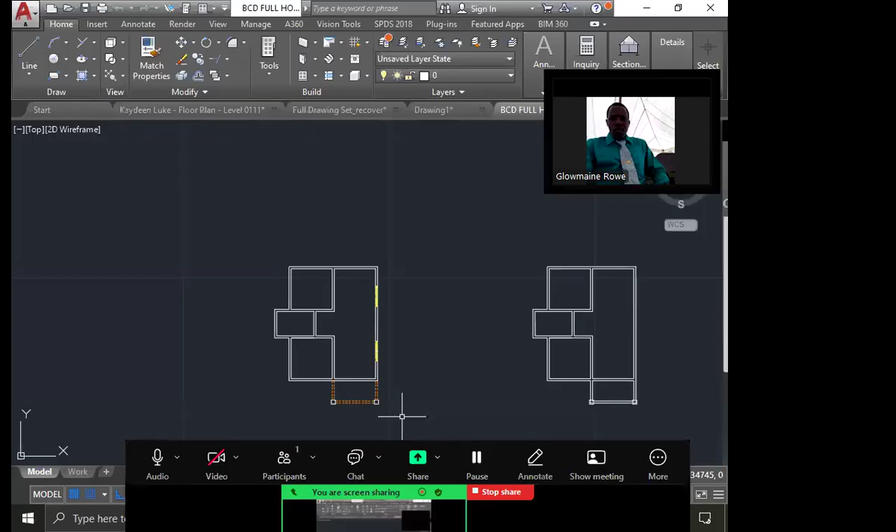It seems the latest progress from the last drawing was not saved, so I'll just begin from where this one left off. So we're currently working on putting in all the windows and all the doors.

We said there should be a line on either end of both your windows and your doors to represent a break in the wall, an opening in the wall. So we said the door was 1,000 millimeters.

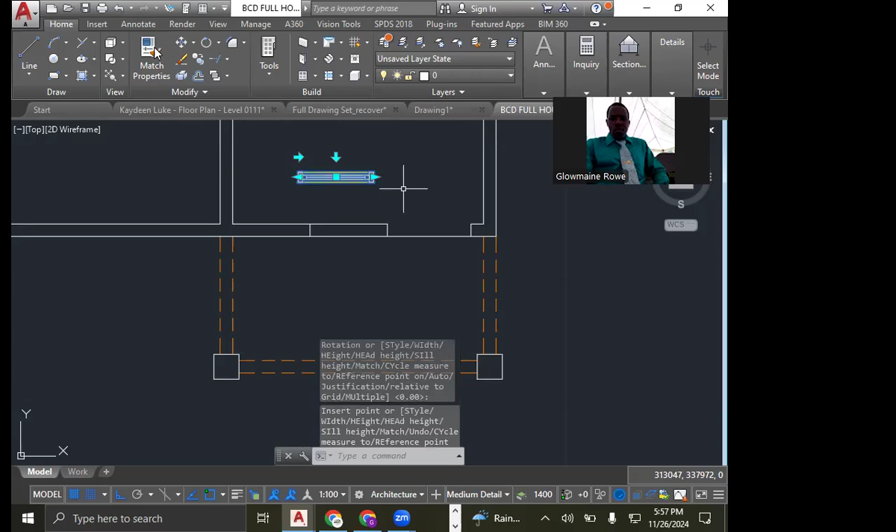Go again, not hearing you. Which one? Windows, I'm finishing up the windows first. Yes, because my job wasn't saved, so I have to start back from there.

As a rule of thumb, try to ensure that your windows are centered in the span of the wall in each room as best as possible, so that the natural lighting is evenly distributed.

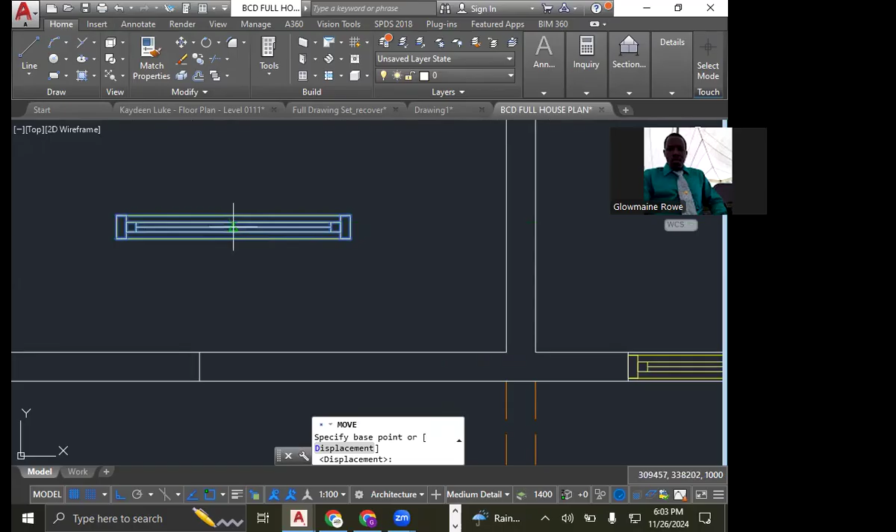Yes, remind me of your name. Sir, just walking in, remind me of your name, for the register. Francis. Yes, name? Samuel. Samuel? Yeah, right. All right, so Francis, all right.

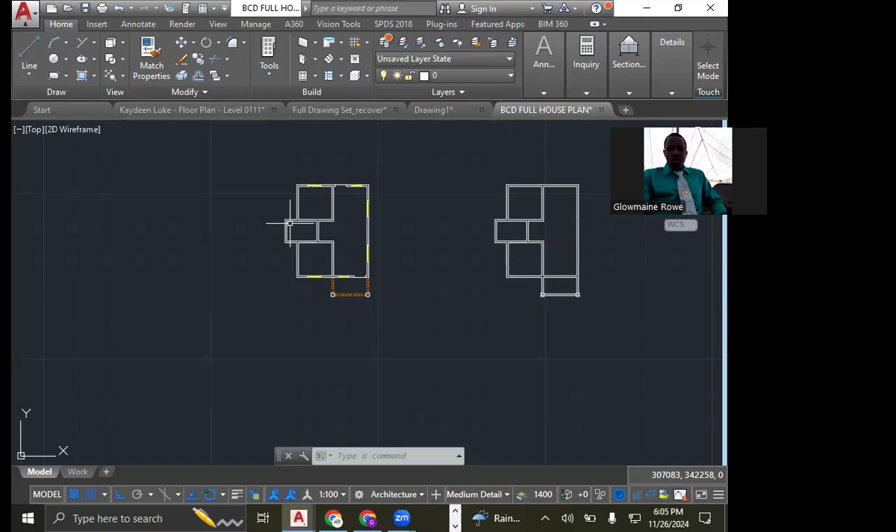Name? Craig? Ryan. Yes, Shani. So for the future, once you come into class, after class begins, just make sure you stop and get a name mark. All right.

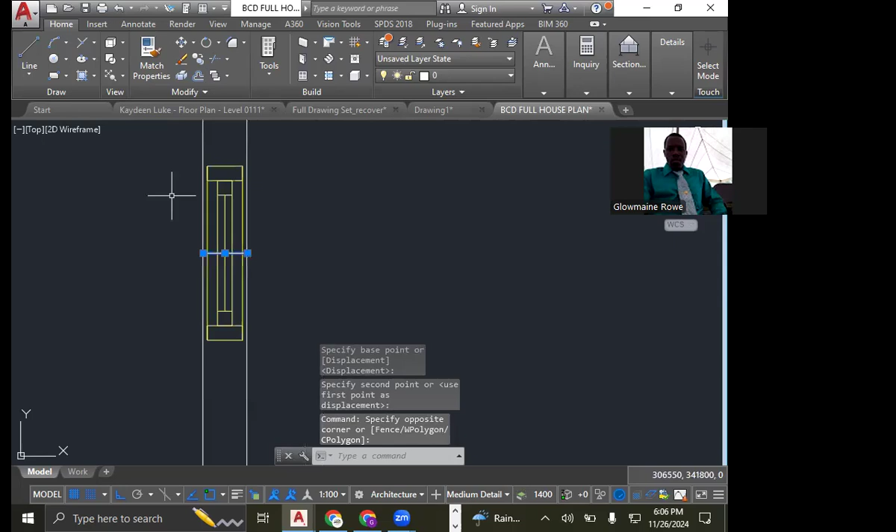Christian, you have all your windows in place already? Okay. Okay, so, okay. All right, let me see more to this now again.

All right, so we're gonna put in doors now. By the way, a trainee pointed out last class it was an oversight that the doors, based on safety standards, the front door and the back door are supposed to be swinging outwards. So even though on the drawing we have it swinging inwards, we're gonna make ours swing outwards.

So for the door, same procedure. We type the word door, or we can find the door icon here in the upper command ribbon. If we're gonna type it, you type the word door, then press enter in your command line, which is set to 1000. Then we right click.

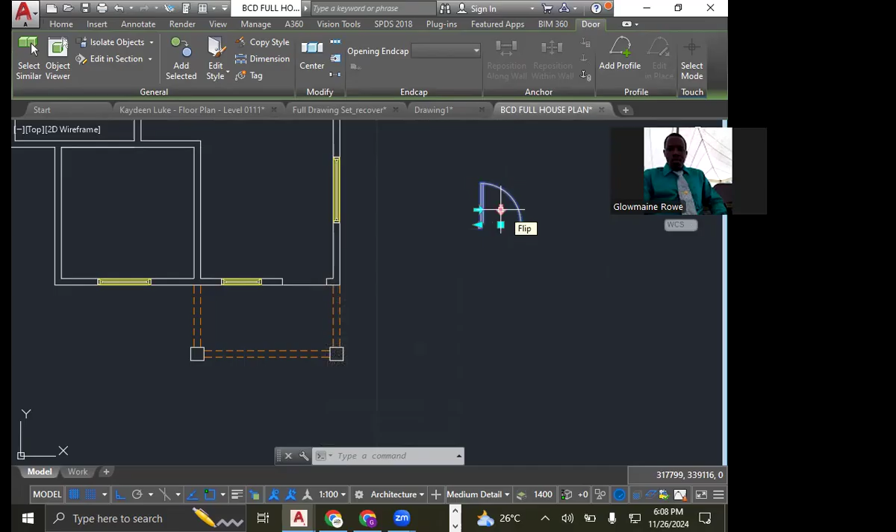Then we click, left click, or regular click. Move our cursor to the right, click again, press escape. Then we highlight our door. We want to change the swing of the door, so we press this arrow in the center of the door.

And then we press the arrow at the side of the door. Now we're going to select the move command, holding the door from the center of the door jamb right here, and we place it at the center of the wall.

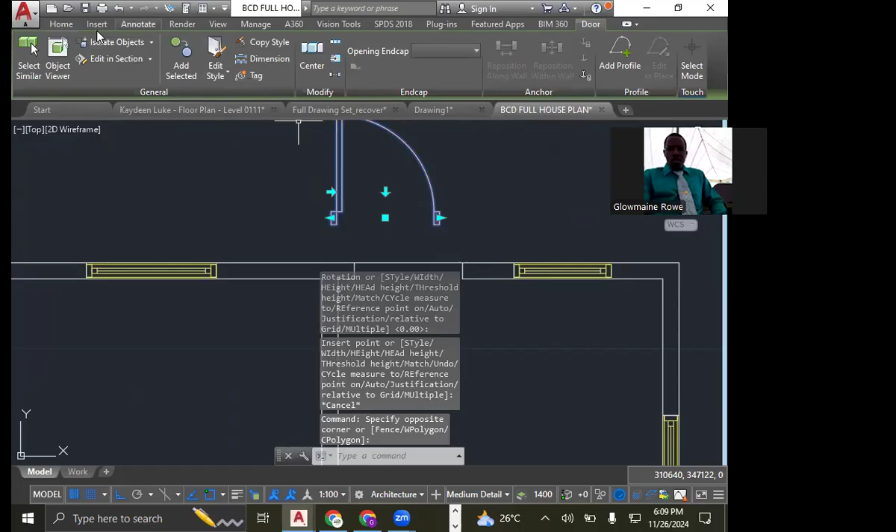Let's do the same thing for the back door. So we right click, left click, move your mouse or cursor to the right, then left click again, press escape. Highlight our door, select the move command, and we're going to hold the door from the center of the door jamb and paste it at the center of the wall.

So 2 doors down, 3 to go: 1 for each bedroom and 1 for the bathroom. So I believe we had said the doors for the bedrooms was what? 850? Was it 850? Anybody took the photo? The size for the doors... 950. Okay.

So we're gonna step off 150 from the wall. We draw a line in the corner there, and we're gonna move it 150. Then we're gonna offset it 950. And then we're gonna trim out these 2 lines. This is an inside door, therefore we trim out both lines. TR, enter twice, and we trim out these 2 lines.

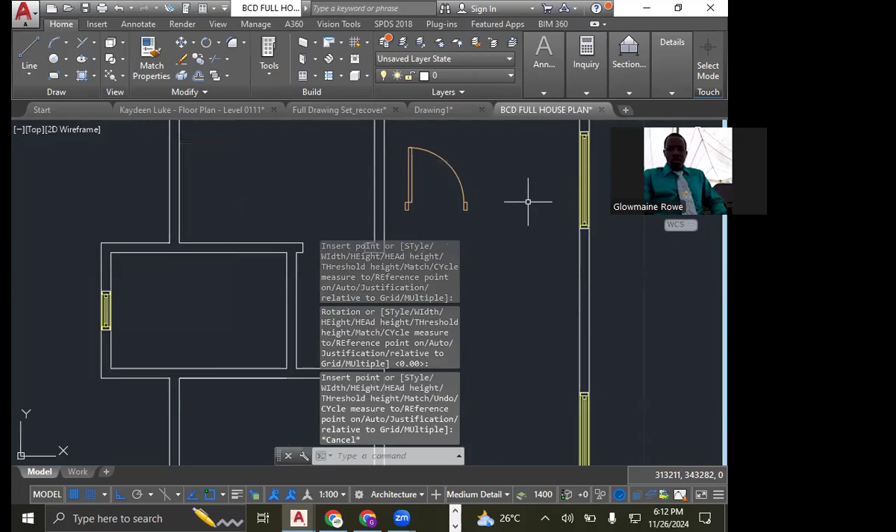Change the width to 950. Click again, press escape. Now we want the swing to go from left to right, so we press this arrow. And then we simply move our door in place.

Instead of repeating the whole process for the other bedroom, we're simply going to mirror this door. So we highlight the door.

If you highlight something that you do not want to highlight, hold shift and click on that item. You'll see a minus sign come up above the cursor that allows you to deselect an item. This can come in handy, for example, when doing a roof plan and highlighting multiple members at once, and you accidentally highlight something you don't want. Instead of starting all over, you can hold shift and deselect.

So here we go again. I highlighted this by mistake, so let's hold shift and deselect.

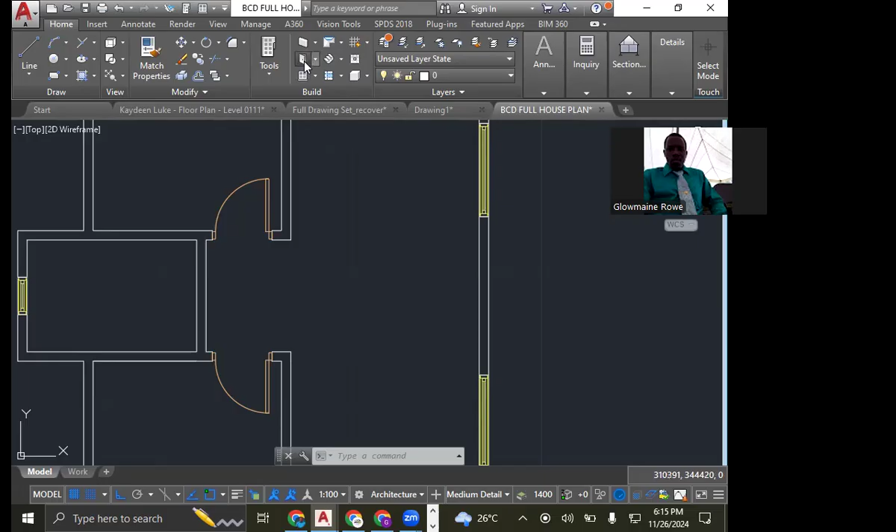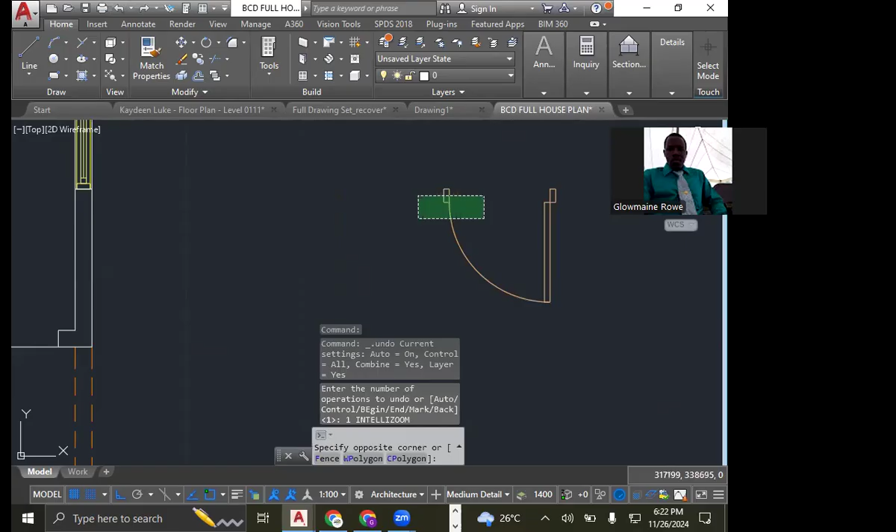All right, so you're going to make the space for your front door and for your back door. So for the front door, let me just delete this. We don't have time to go over this multiple times, training, so I'm just going to go over it once and then we'll move on.

So at the front door, we're going to select line, draw a line here in the corner, and draw a line there in the corner. Then this line, we're going to highlight it and select the move command. Click anywhere, move your cursor to the left, and type in 150.

And trainees who already have your doors in place, proceed to label your rooms. Give each room a name based on the photo in the group.

I'm going to highlight that line, we're going to offset it. Type offset, press enter. It asks you to specify offset distance, punch in 1000, then press enter. We'll move our cursor to the left, and we click.

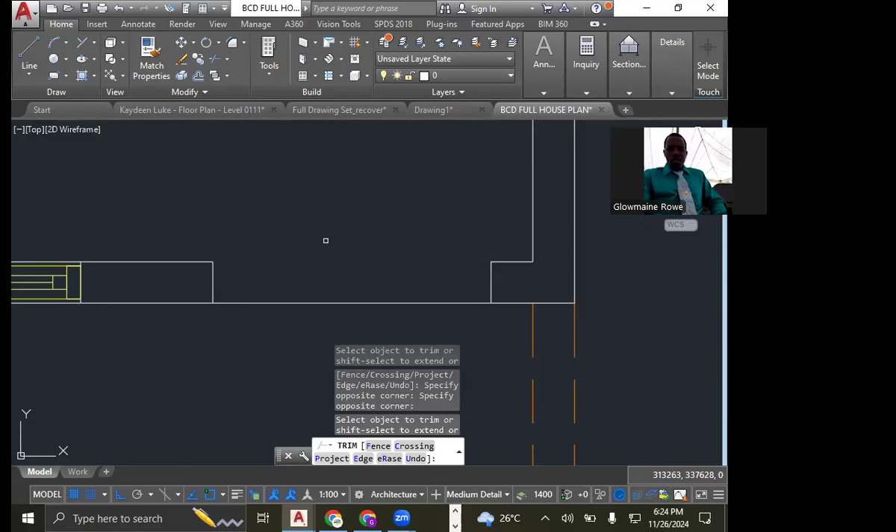Then we're going to select door, or type the word door and press enter. Here where we have width, we put that to 1000, and we ensure that the section that says measure to is set to outside of frame. Then we right click for the door to appear, then left click to position it, and then rotate it to where we want it, and left click again. Then we simply move the door in place, holding it from the center.

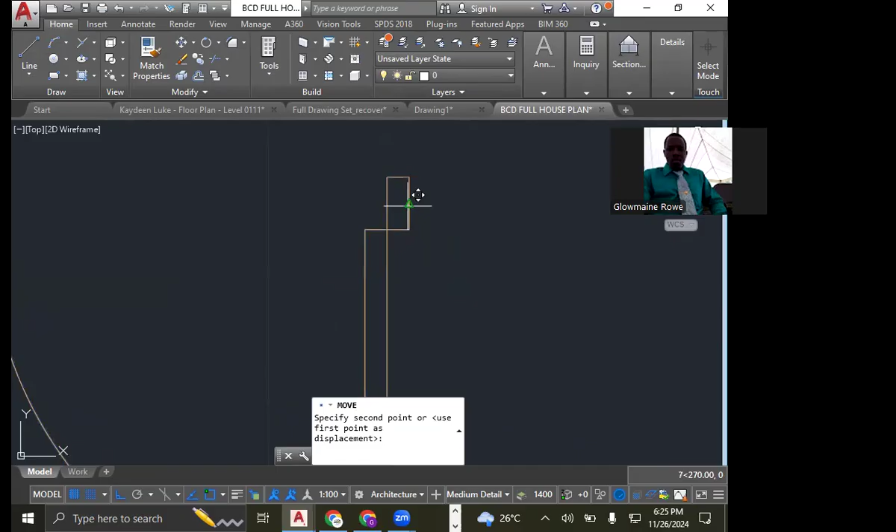We're going to repeat the same procedure. A lot of things done in building drawing are repetitive, so once you get the hang of it the first time of asking, you can go ahead and do the rest. That's how you put in a door or a window.

So we draw the line, then we're going to move it 150. Then we're going to offset it 1,000. Then type TR, enter twice, and we're going to trim off the lower line. Once again, this upper line shows that there's a change in floor level.

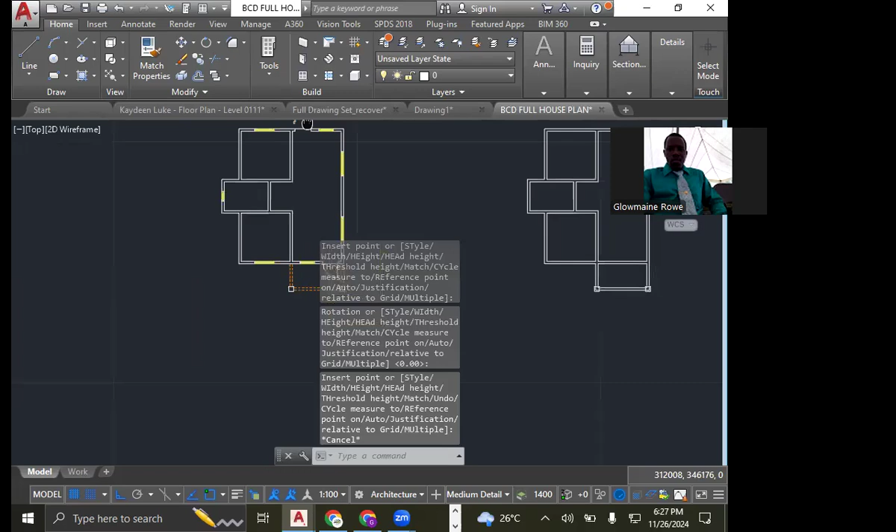So select our door again. It's already on 1,000, so we just right click, left click, move our cursor in the direction that we want the door to be positioned, left click again. Then we move the door, holding it from the center of the door jamb.

You want this one where they're putting on your side? You mean this line here? Yeah, that one. Yeah, 150 mm.

All right, so we're going to do the same thing for the bedrooms, but we're going to move the line 150. But the size of a bedroom door is 950. Move this 150, set to 950, and then we trim out both lines.

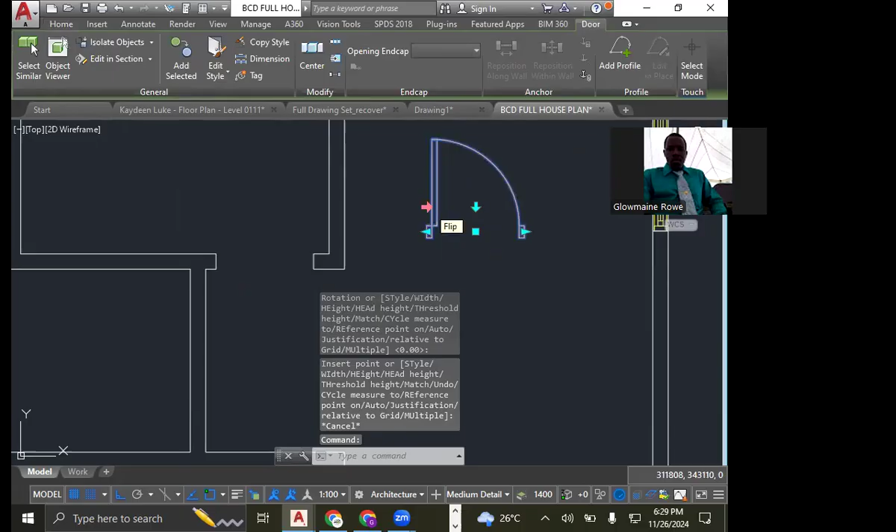Change that to 950, right click. Then we click on the door and press the arrow on the left to change the swing direction. Place our door in place, and then we said we can simply mirror the door.

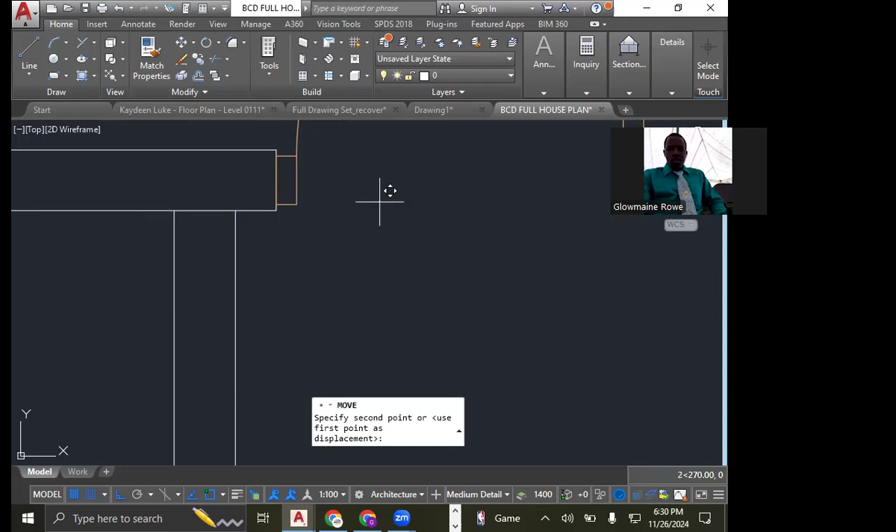And we said that for the bathroom door, it was 800. Based on the photo, the bathroom door seems to be closer to the wall, so instead of moving this 150, we can move it 50. As well, you can place the bathroom door directly up against the wall. Either one will be accepted. Offsetting this 800.

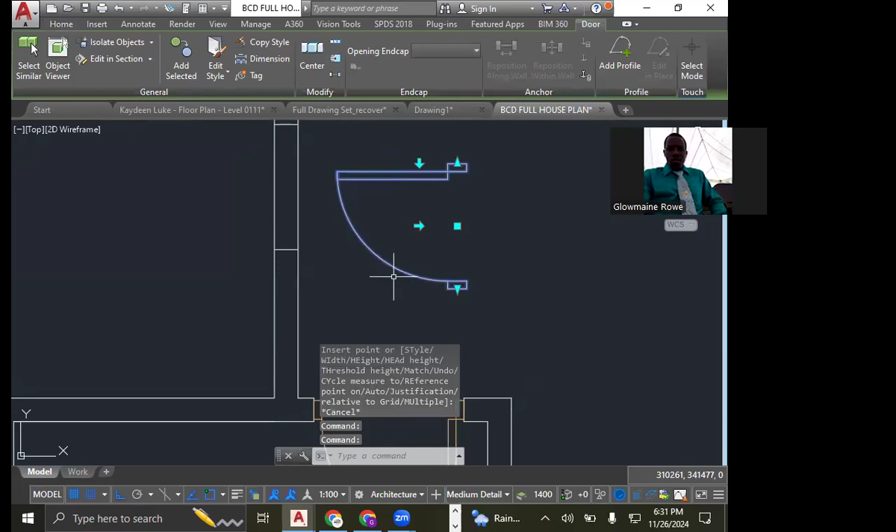All right, so I want to change the swing direction, press the arrow, and move the door in place. Remove both lines. And now we have all our windows and our doors in place.

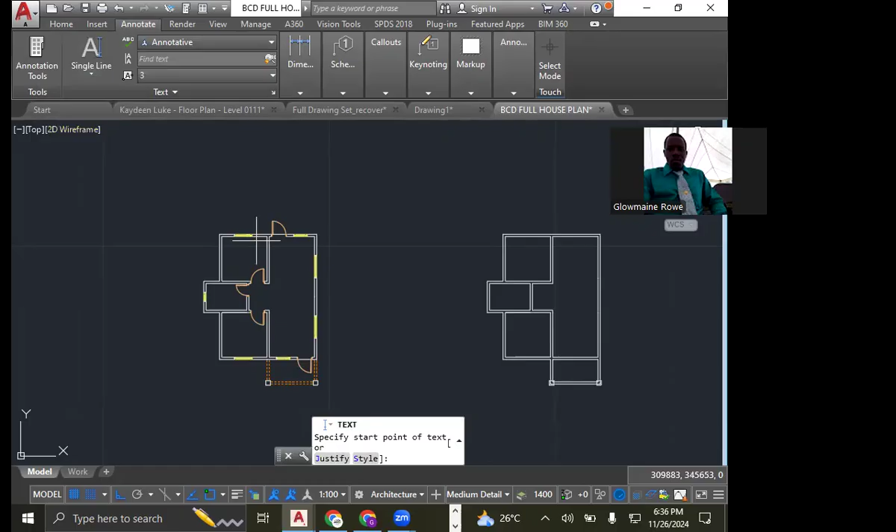Click once. It says specify paper height, punch in 0.03. Rotation angle is on 0. Press enter.

And then we're gonna type in bedroom 1. We're gonna leave it as bedroom 1. Click anywhere on the drawing space and then press enter.

So we're gonna change the text height to 3. Paper text height, change that to 3.

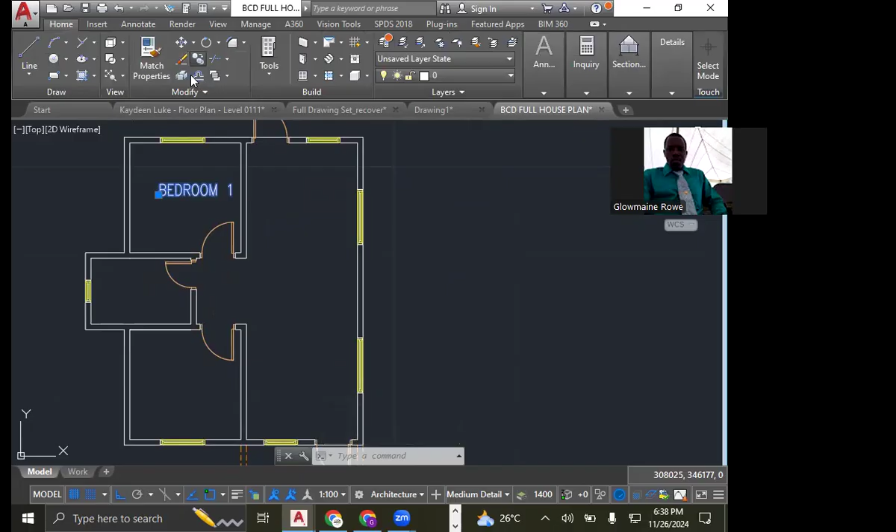So once you have labeled one room, you can simply copy the text, turn off your ortho mode.

Paste it at all the relevant areas, and then you're gonna double click on the text to edit.

Let's start with the bathroom. Double click. And as we should remember by now, all the text should be in all caps.

Kitchen, dining, we have one for living as well.

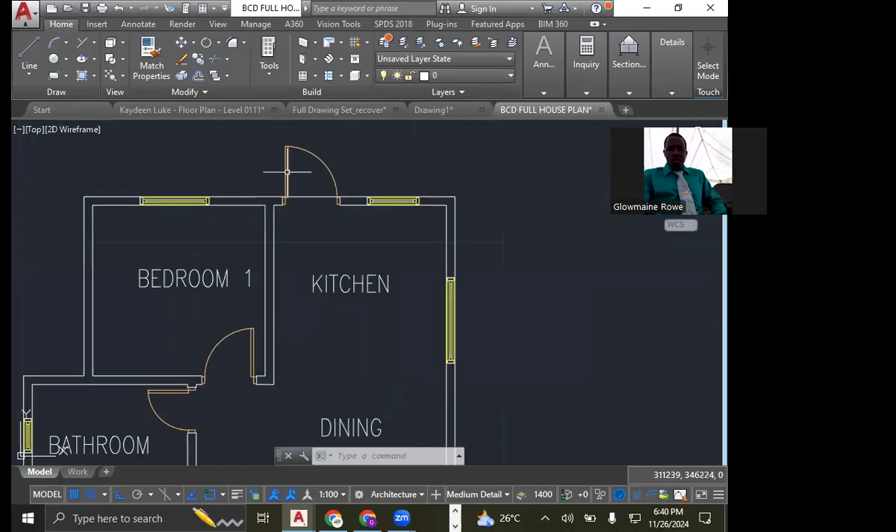Also, we have a step at the back door where the kitchen is. So the step is going to be in the Y direction, it's going to be 1 foot, which is 300.

And in the X direction, it's going to be 1,000. And there's 2 steps, so we can simply copy this and paste it on top of itself.

Pull it from the base, paste it at the top.

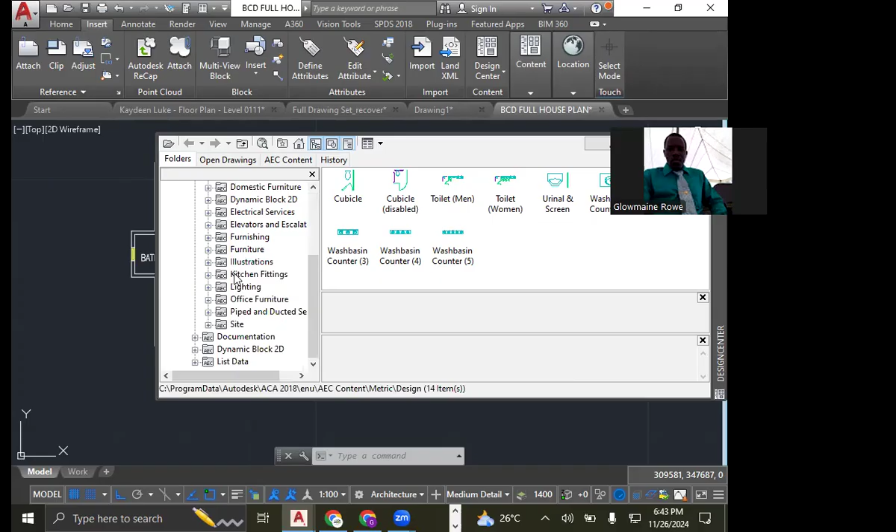All right, so you have global, imperial, and metric. You want to press the plus sign beside metric. You have construction, design, documentation, dynamic block.

You're gonna press the plus sign beside design, or you can double click design on your right, either one. Now design opens up and it gives you a host of different options.

All right, so let's start from the top. Appliances is at the top. We have kitchen, washroom. We do not have a washroom on this specific plan, so go to the kitchen.

All right, so we click on each item to see the preview as to what it looks like.

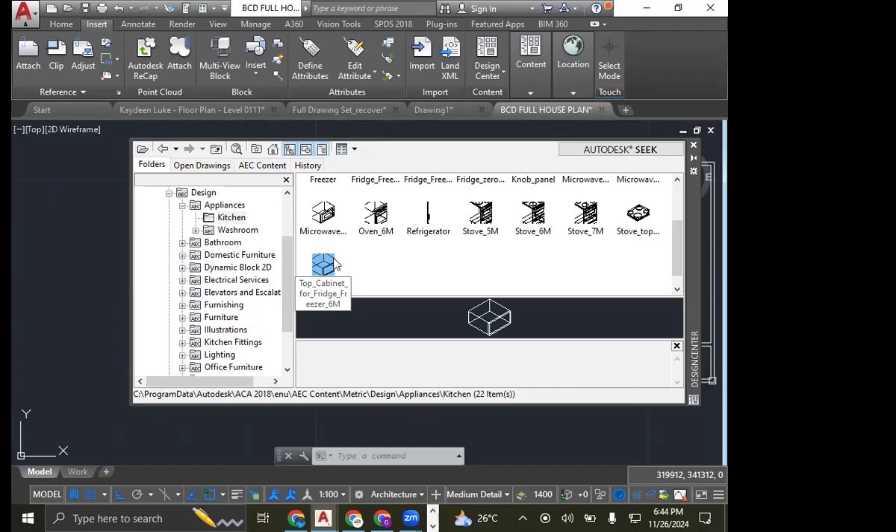All right, not liking the blocks in this one. So let's skip on to bathroom.

All right, basin. So you can select the one that is desirable to you.

Bathroom is a bit small, so I'm gonna use the oval one. So once you find the one that you want to use, you double click on it.

And as you can see, the block item comes up on my cursor. Here it is. You simply click for it to paste, then press escape.

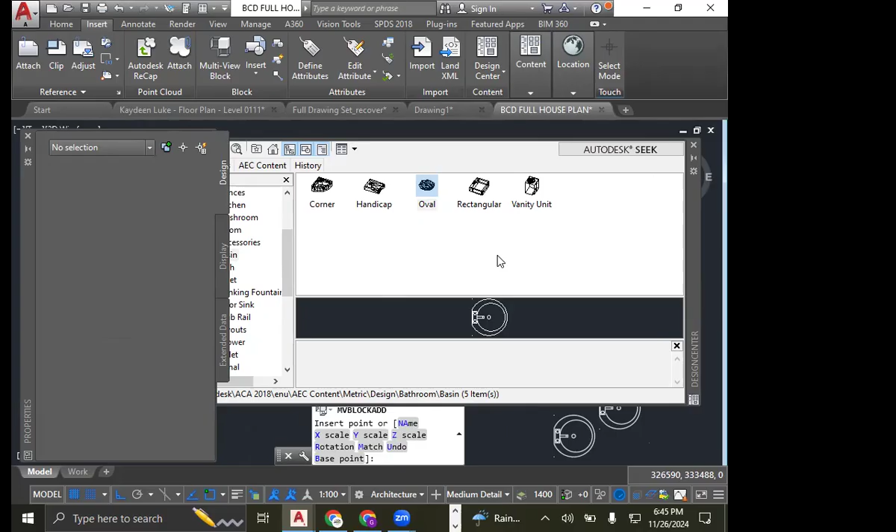Let's pull out the bathtub. Double click bath. My own only has one option for the bathtub, so double click it.

Click for it to paste. Press escape.

What else do we need? Need a toilet. So we double click. Check out the different designs.

Shop around. All right, double click. Click for it to paste.

And as I said in a previous class, the blocks that we use from AutoCAD, they have a layer for themselves, so you don't necessarily need to make a layer for the fixtures.

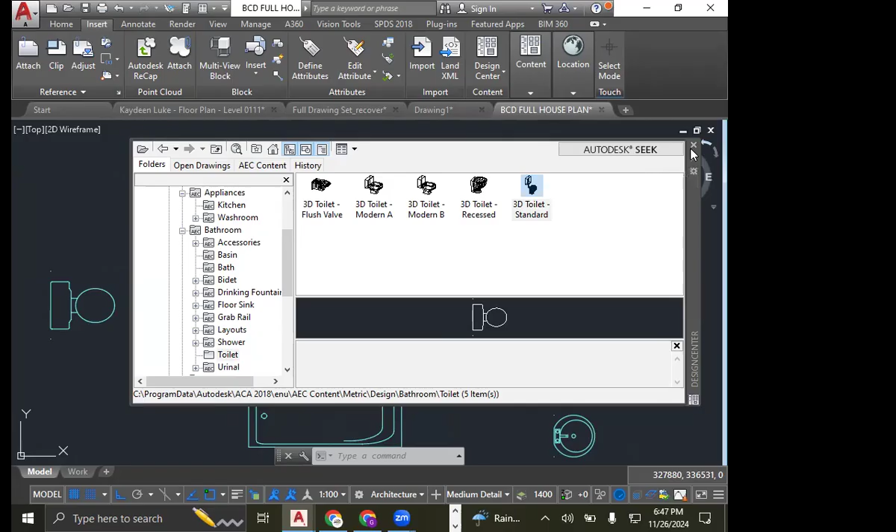And let's pause a bit and just fit these in. All right, so turn off your ortho mode.

Let's see if this bathtub can fit vertically. Let's rotate it. Set rotate command.

If you want to rotate your blocks trainees, you can click the rotate symbol up here, right beside move, or you can type the word rotate.

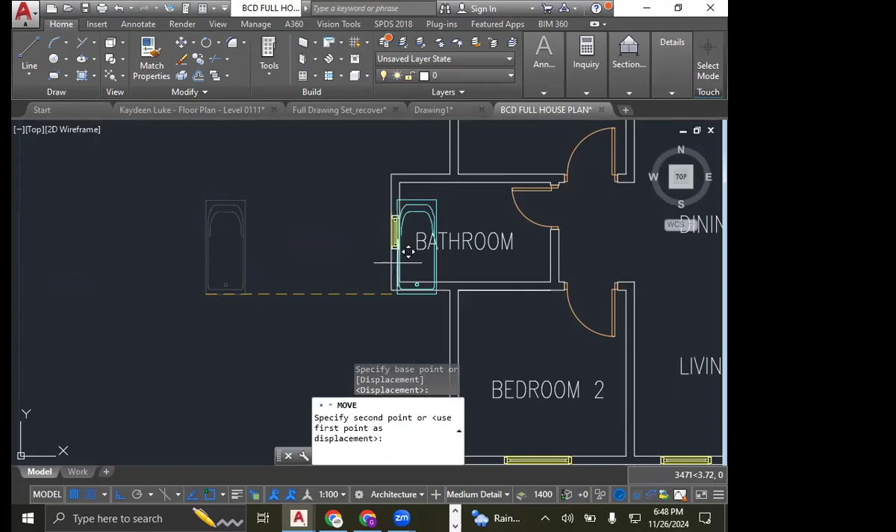Turn back on my ortho mode. And let's see now if this thing can fit. Wonderful.

We'll just draw a line here at the end.

And at the end of your bathtub, sometimes if the bathtub is a bit shorter than the width or the length of the bathroom, they usually just put a little concrete structure at the back and tile it over. Everybody familiar with that, right? You can rest a soap on it and your shampoo, etc.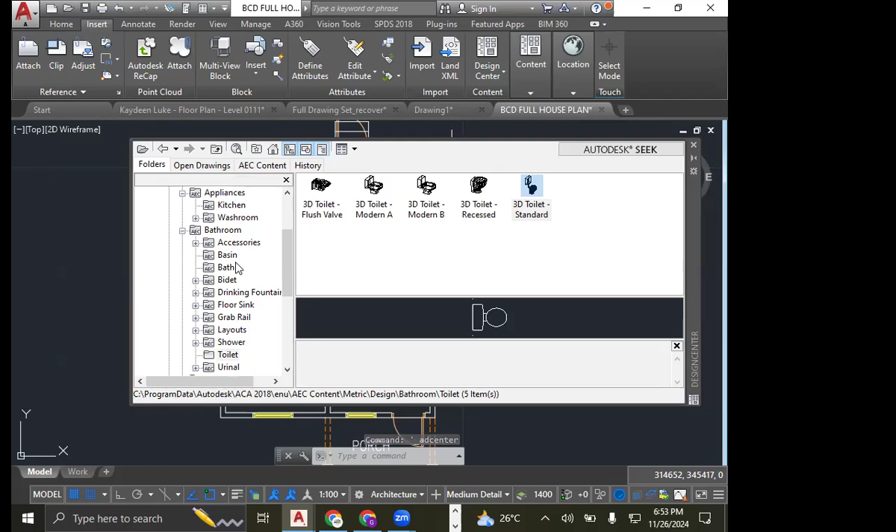All right, so let's just drop a bed in each room. So domestic furniture, bedroom. I said them have chest of drawers, but these are just plan view, so it's only gonna come up as a rectangle. Right, so that's a double bed, single bed. And let's use a double bed.

You can just use one bed and then mirror it. Click on the bed, mirror command. Press at the center. Show your ortho mode is on. Click, enter.

That's enough for kitchen, dining and living. So we're gonna put in the stove. Let's find a stove.

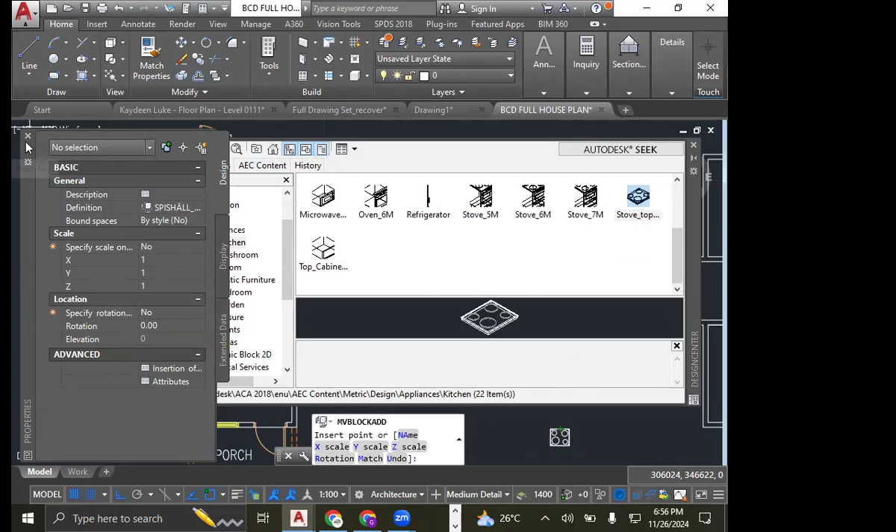All right, so let's find a refrigerator.

All right, so let's find a kitchen sink. All right, so we have to move away from appliances. Alright, kitchen fittings.

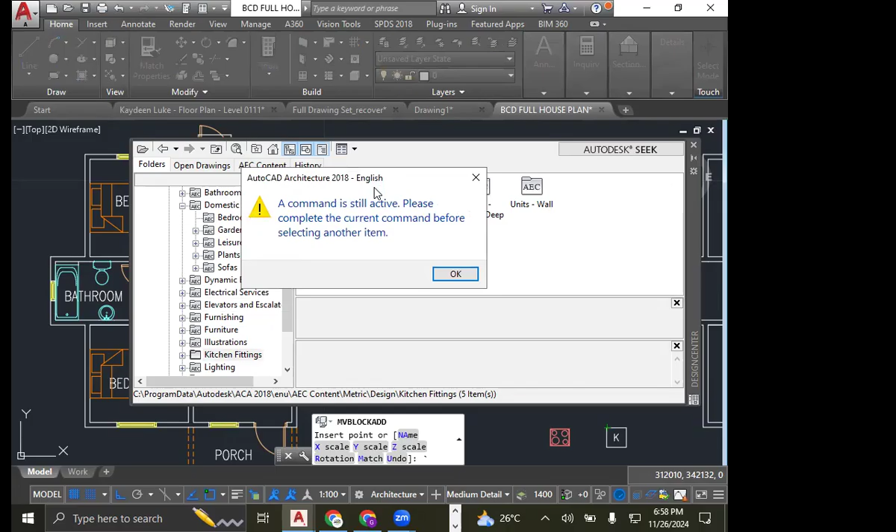All right, I like to use a double sink. Can use a double sink that has the drain board attached. Anything that you're compatible with.

All right, so let's insert our sink, rotate.

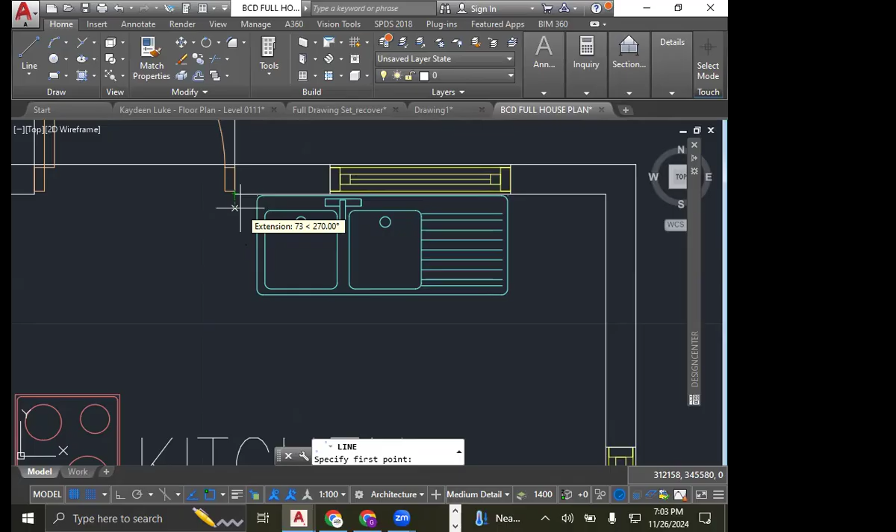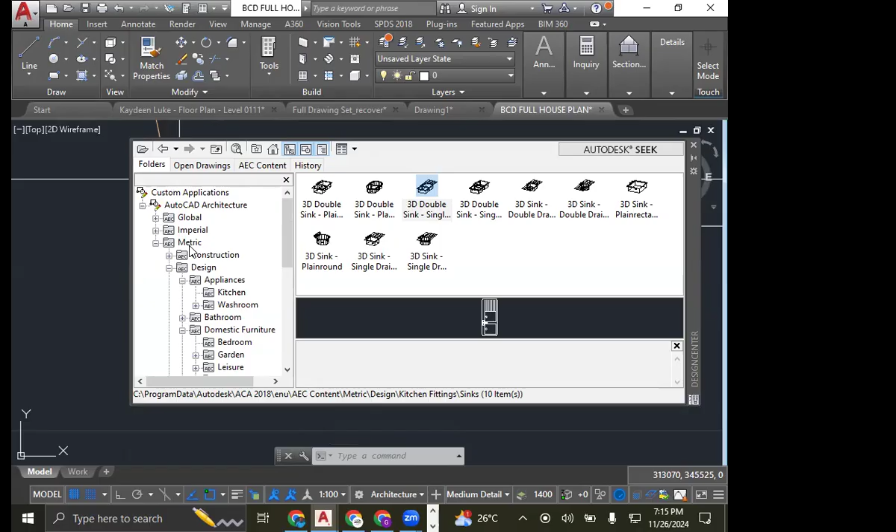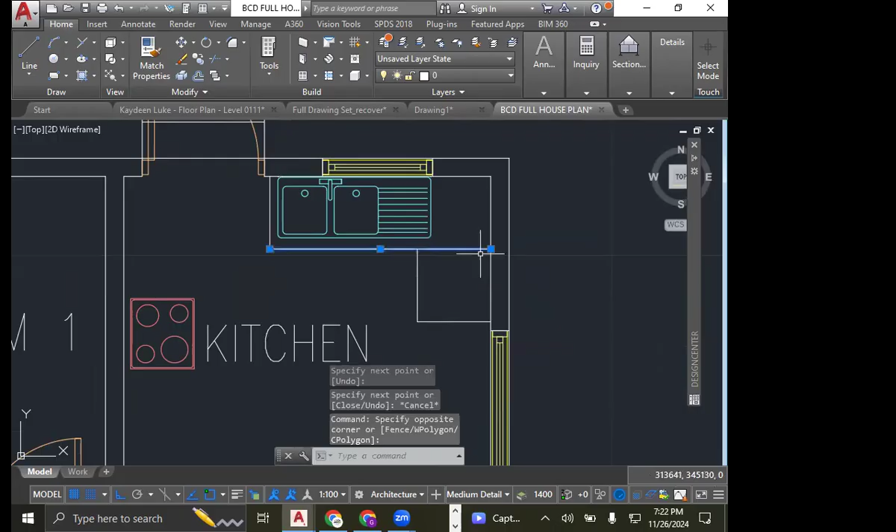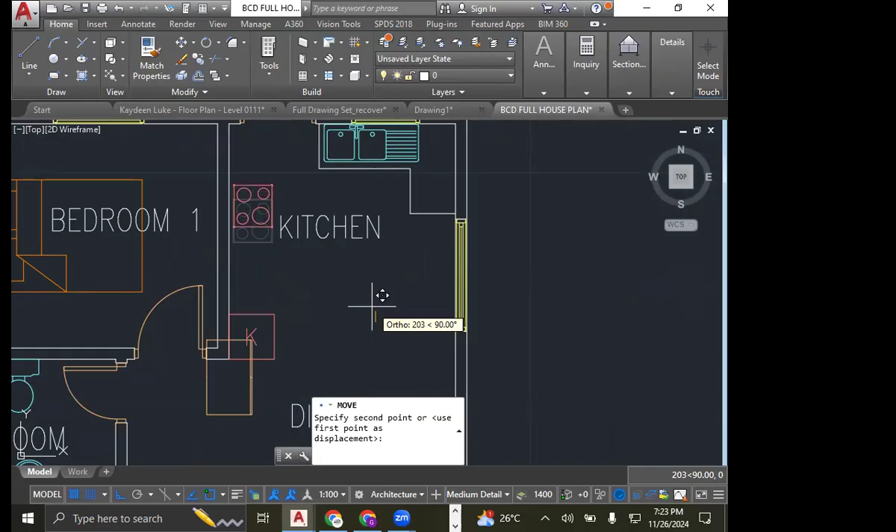And let me use another counter to get provisions. Let's see, kitchen fittings. This counter is too long. Let me just make the counter 600.

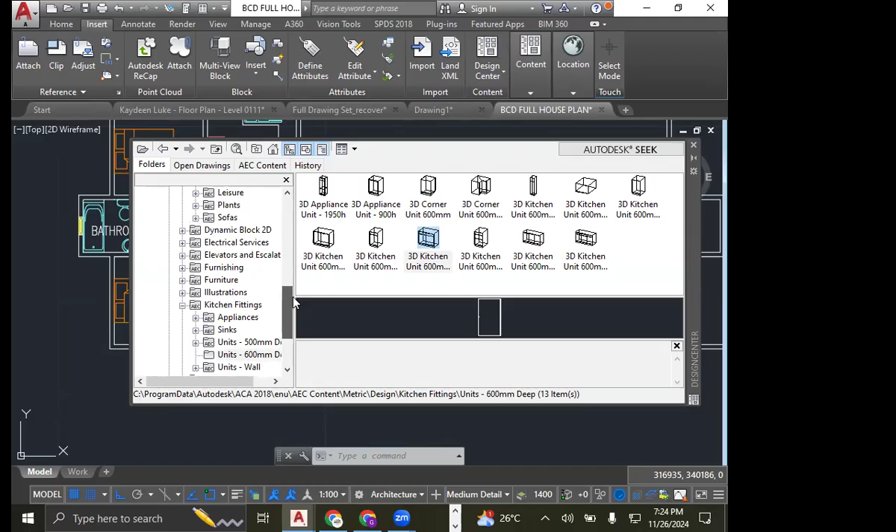Alright, so dining and living furniture. So it's kitchen, bathroom, domestic furniture, bedroom, garden, leisure, and sofa, dynamic block, furnishings, bathroom. Alright, so get some tables for the dining area. So on the look bar.

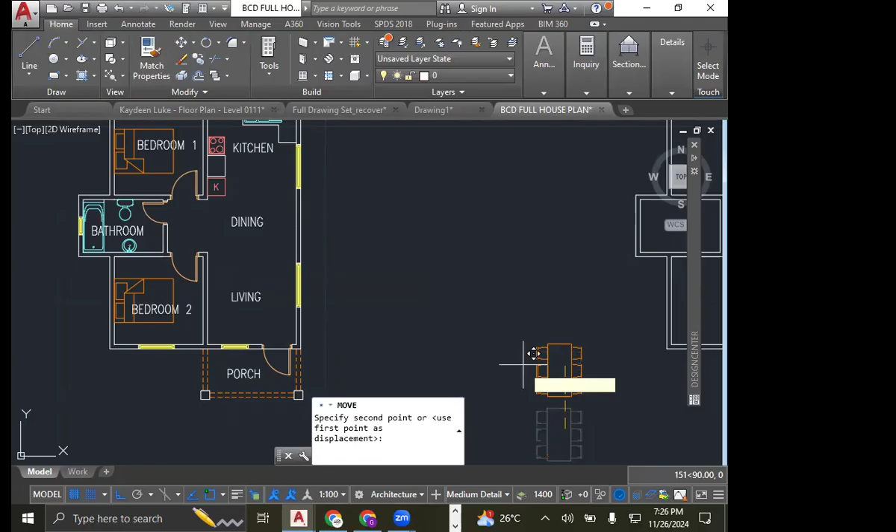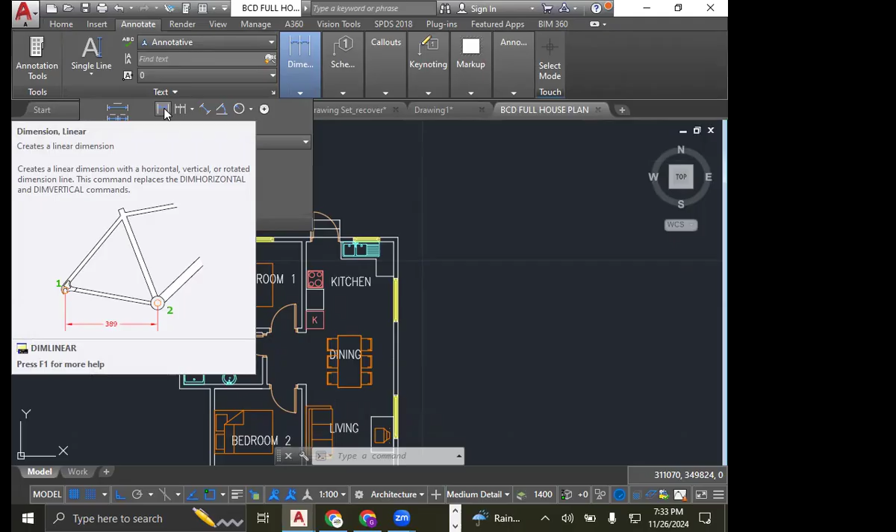So, as we had said before, the first thing you would have done in the traditional method, the first level of dimension is our... anybody remember? Nobody? Alright, so when we're dimensioning our floor plan, we have 3 levels of dimensions. So the first, I want to know what is the first level of dimension. What does that measure? Not quite. Alright, just think back, Shady. Remember when you're reading the floor plan and you had that second text. Go again? Yes, there we have it.

So the first level is our openings, which are our windows, doors, and arches. Alright, that's the first level of dimension. And then the second level of dimension, as Wright would have said, is your wall thickness and your room size. And then the final level of dimension is our... anybody? Yes, the overall length and the overall width of your building.

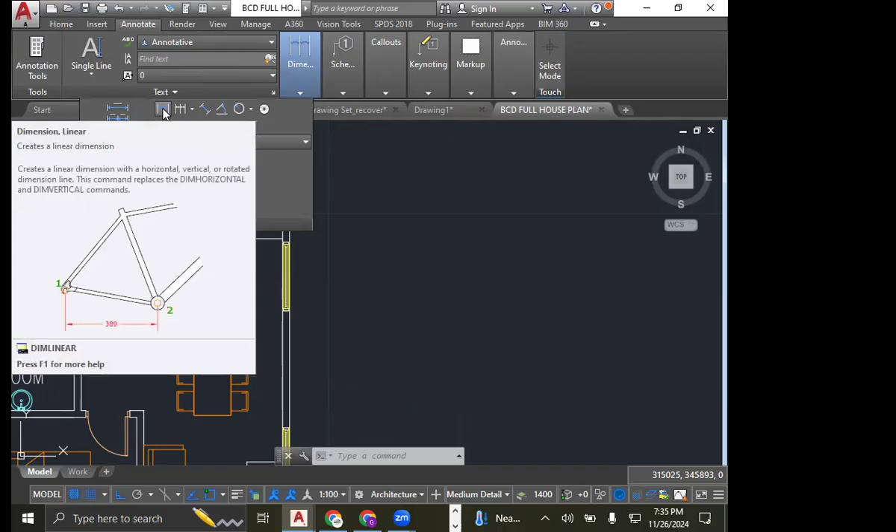So now, let us work on the first level. I'm going to start on the right side, seeing that this is the simplest side of the house. So, once again, let's start over. Go to Annotate. Go over to the section that says Dimensions. And we're looking for Dimension Linear, this icon here. Click.

And we're going to be starting from the corner, the upper right corner of our floor plan where the kitchen is. And we're going down to the first point of our window. And that's one of the reasons why we have to draw the line at the beginning and the end of the window.

For dimensioning purposes. So once you click, you can also set the distance away from the joint that you want your annotation, your dimension, to be. So you can put... let's try 750. Alright, 750 seems a bit close. Let's try 1,200. Click. Move your cursor out, punch in 1,200, press enter.

Question, Shane, is does your dimensions look like mine? Wait. Alright, no problem. Yours are in feet and inches.

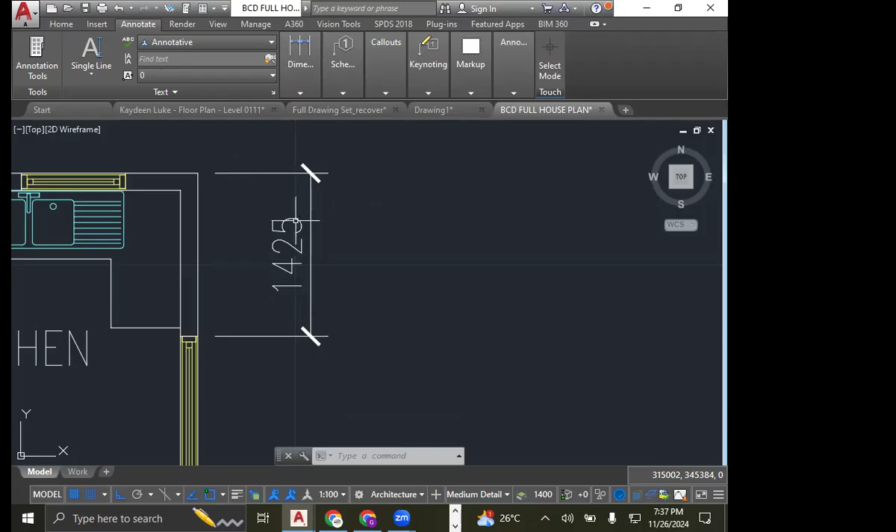Other than the fact that some of you have your dimensions in feet and inches, is the text size big enough? That means somebody wants it small.

What about the architectural ticks? Are those visible? All right, so what you're going to do is click on your dimension.

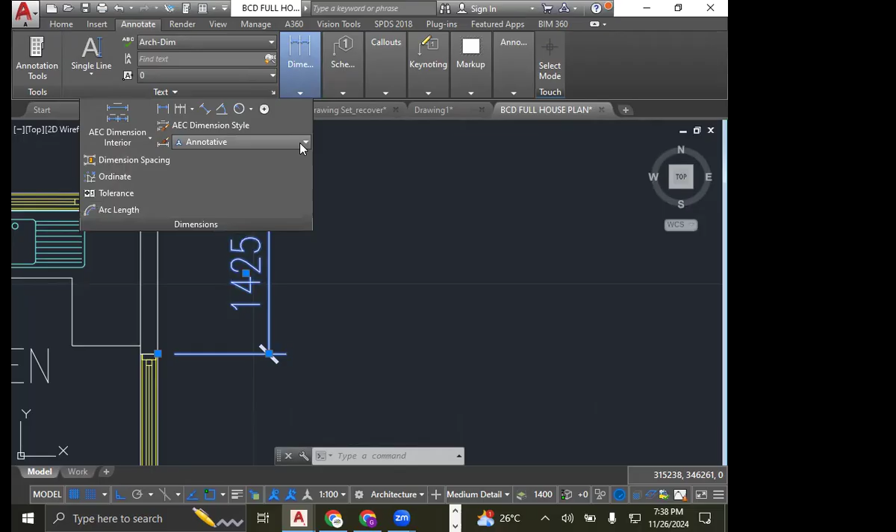In the section that says dimension, up top, take note of what dimension style you are using. My own is annotative, here it is. You're going to look right here to tell you what style you're using, press the drop-down arrow, and go all the way down to manage dimension styles at the base of your dialog box.

Click, and another dialog box comes up. Whatever dimension style you are in, ensure that you select it on the left hand side. Mine is annotative, so I select annotative. If yours is stairs, standard, or annotative UK, whatever it is, select it on the left hand side.

Now we move to modify, here on the right, third option from the top. We have different sections: lines, symbols and arrows, text, fit, primary units, alternate units, and tolerance. Fit and tolerance we usually don't do anything in for building drawing, at least.

So let's go into lines. All right, so is everybody on this dialog box, by the way? Are some people still up? Because I want all of us to be.

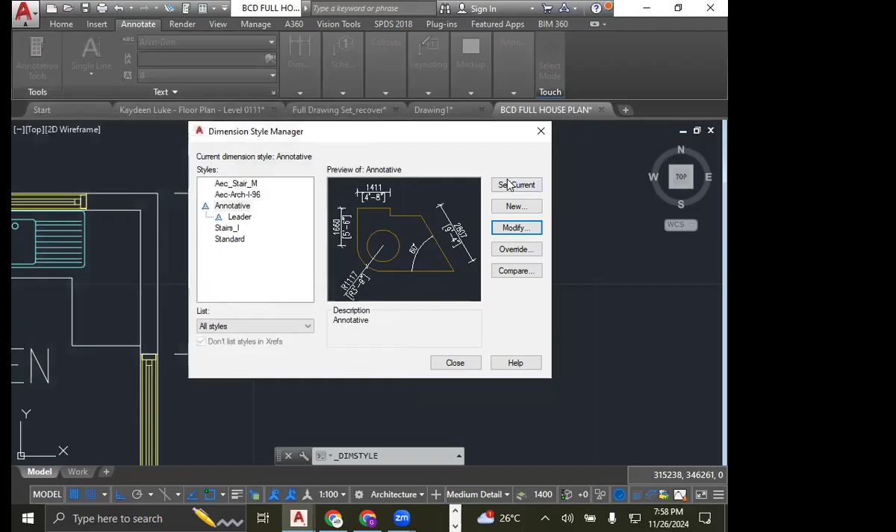All right, so follow this now, trainees, let me put my dimensions. Make a layer for your dimensions, trainees. So pause the work, type LA, enter. That's a short code, or you want to type out the whole word, anything. And I'm gonna make a layer for your dimensions. This is gonna be very important, so you can turn it off and turn it on when you're ready. All right, so press. My thing gives little problems.

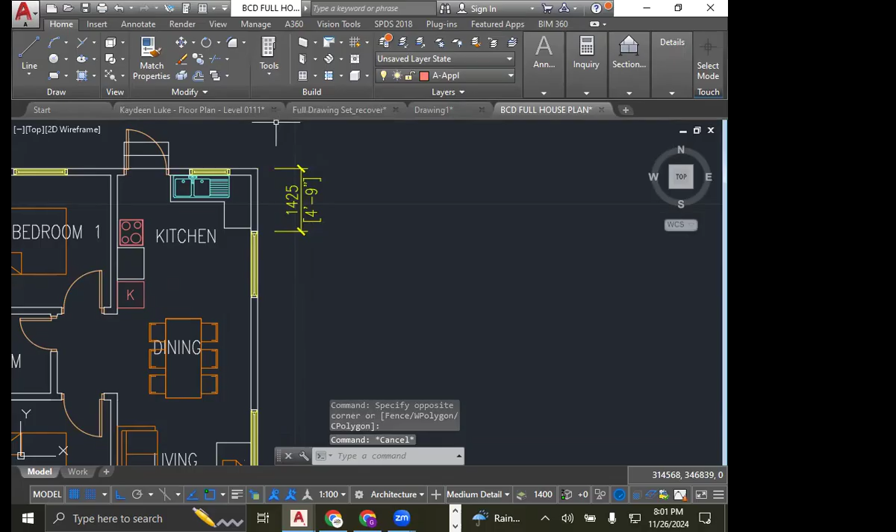So I'm gonna name our layer A-dims, A hyphen dims. I'll put mine in yellow. All right, so find A-dims. So now, I think I can make my text height a bit smaller. Let me make my text height a bit smaller.

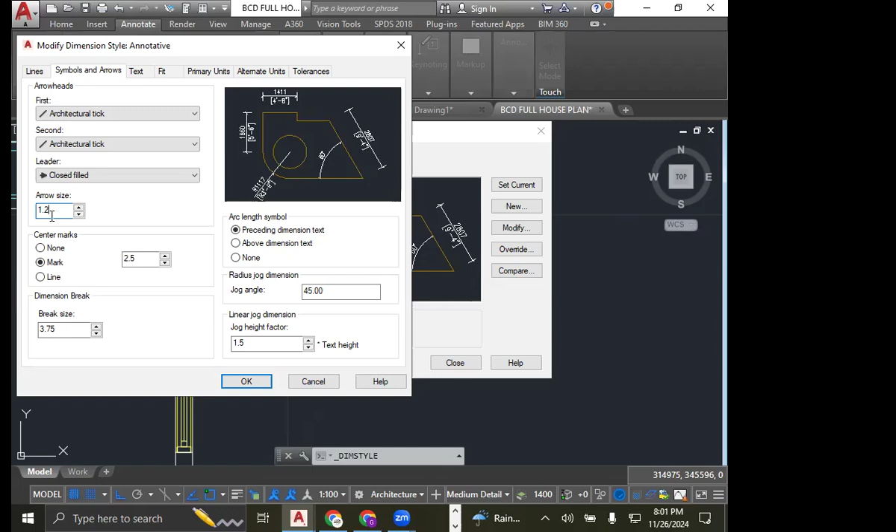All right, so once you have dimensioned one piece, this piece here, from the edge of the wall to the first point of your window, go back into dimension, and you're gonna select the icon to the right of dimension linear. It says dim continue. Right, 3 white lines with 2 double-sided arrows in between them. Click, and this allows you to continuously dimension your drawing.

So now you're gonna click the other side of the window, move down, click that first point of the window, second point of the window, end of the wall, because this orange line is an opening. So beginning of the opening, end of the opening, and then the column. So that is how this side of your building is supposed to be dimensioned.

So take a look at that and do yours to match that. After you do the first piece, which is the wall in front, the first piece of wall there beside the kitchen window, you simply use dim continue and click all the relevant points coming down.

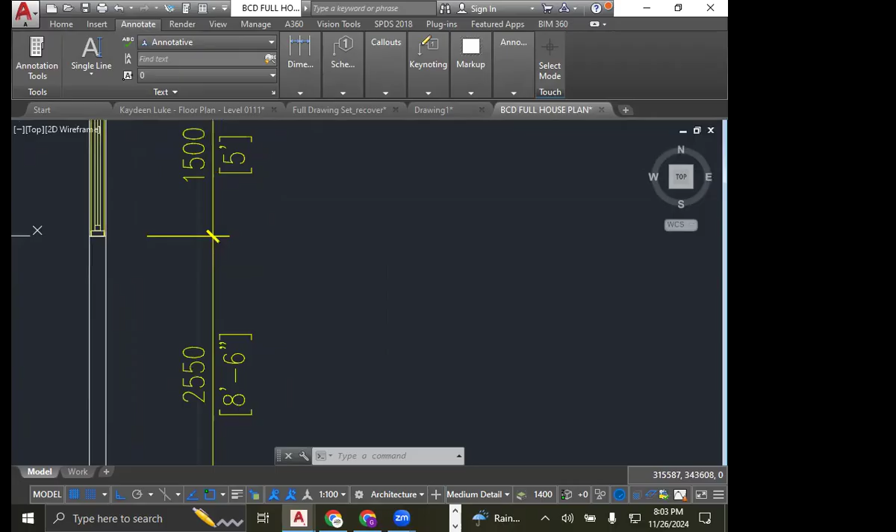So you should have 4'9", 5 feet, 8'6", 5 feet again, 4'9", 4'9", 1 foot. So when it comes down to dimensions, you want the dimensions to be as neat as possible.

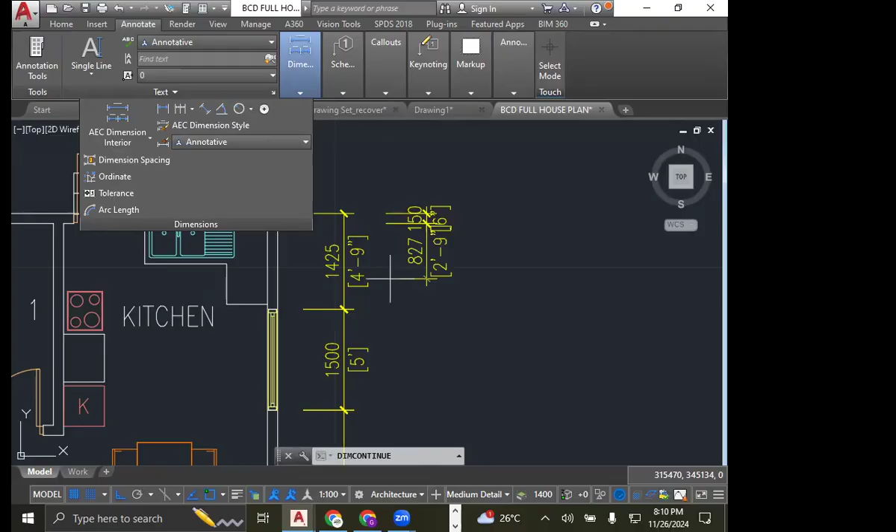So dim continue, and we simply click only the walls. Here, here, here, and here. So we only have 3 wall thicknesses to do.

So the wall thickness at the back where the kitchen is, wall thickness that separates the living from the porch, and the wall thickness for the porch. So that's what the second level should look like.

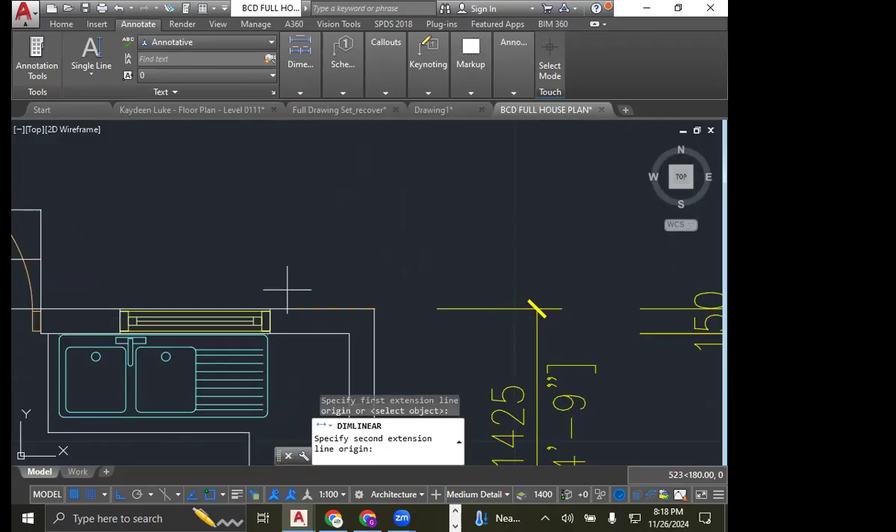Now let's do the back. Dimension, linear. Click from the corner to the first point of the window. Punch in 1,200.

Dim continue. So we are clicking the openings: window, door, door, window, window. I'll look again. There's no openings over this side, so we're actually going to end it here on the bathroom. We're going to end it on the bathroom. So we'll press escape.

So second level of dimensions now. Wall thickness, 2,400. Dim continue. First point of wall, second point of wall. First point, second point. First point, second point. So that's how that should look.

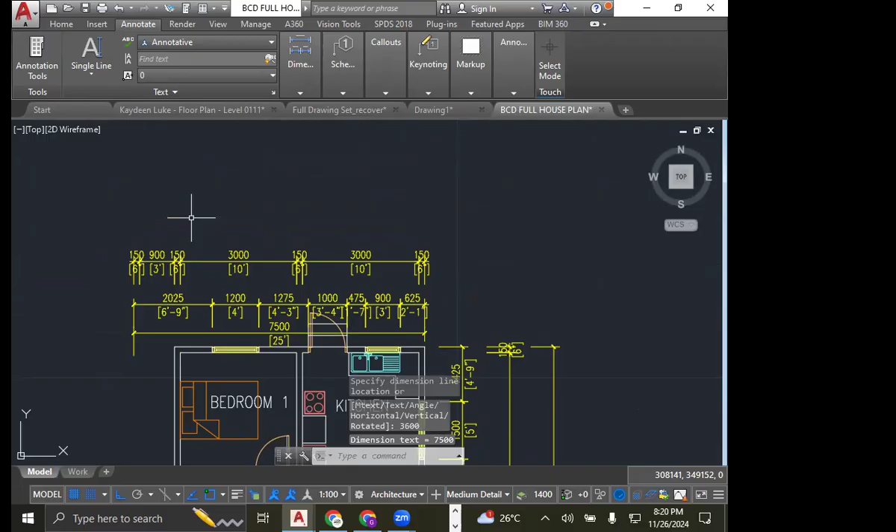And then now your overall dimension. Six hundred. No, I tried to make it equal space with the other one, but because this point is so low, I may have to go. And then move it up, 3,600.

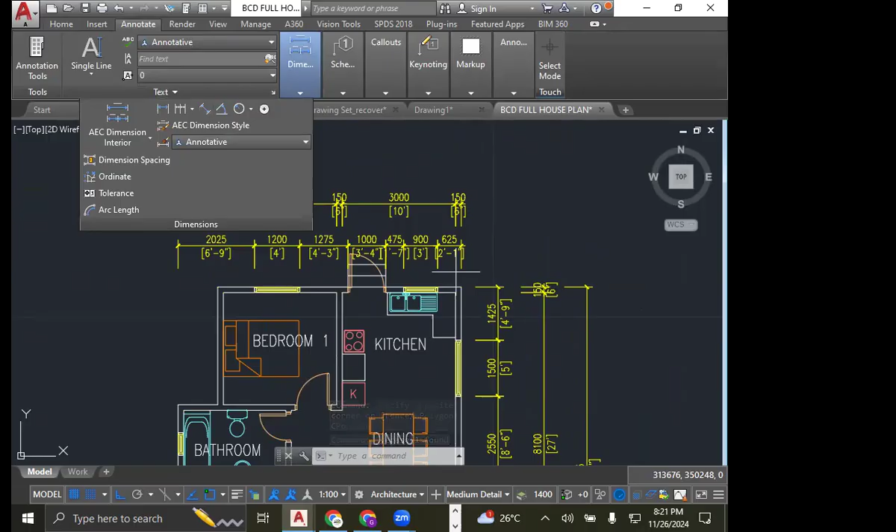Alright, let me delete this and do it the proper way. Let me delete it and do it the proper way. Dimension, linear. Here we go. Alright, so that's how that side should look.

So for recording purposes, let me just dimension the other two sides so you have this to watch when you go home. Dimension linear. Start from this edge. First point is the window here.

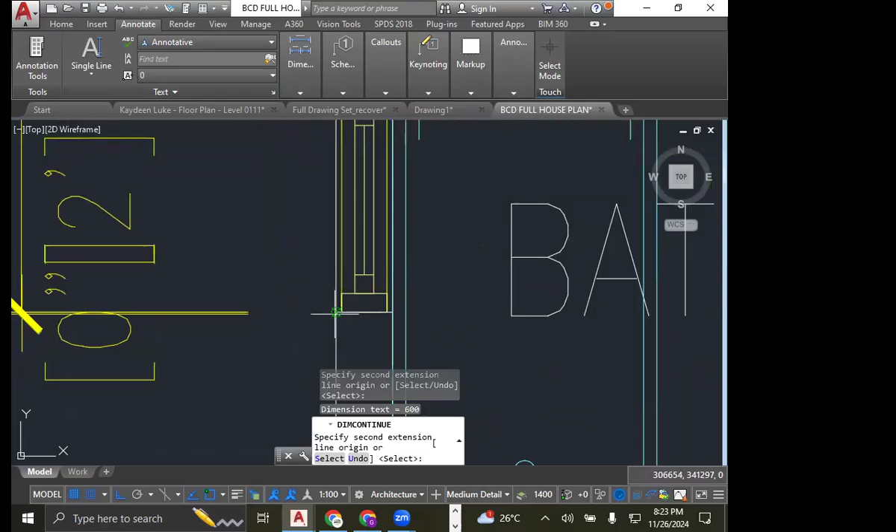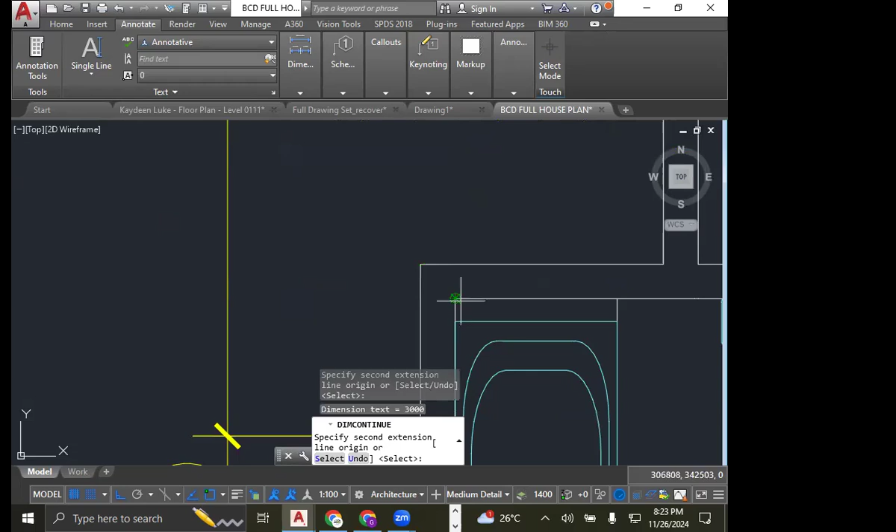Second level of dimensions: wall thickness, room size. Right, then continue. First point of wall, second point of wall. First point of wall, second point of wall. Right, overall dimension.

Let's do this right. Start it from there. Edit this, the number. I edit it to make it larger. Make it larger. Alright, so look on the screen.

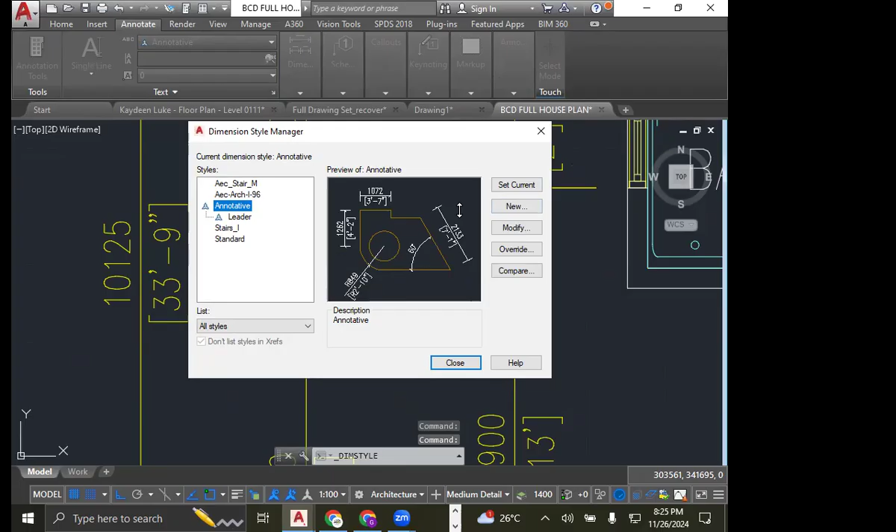Dimension, drop down arrow, manage dimension style. Make sure you select this current style that you're working in on the left. Modify. And then you're going to change the text height. So go into text, this part is the text, and you change the text height. Make that number larger.

So, what means dim continue.